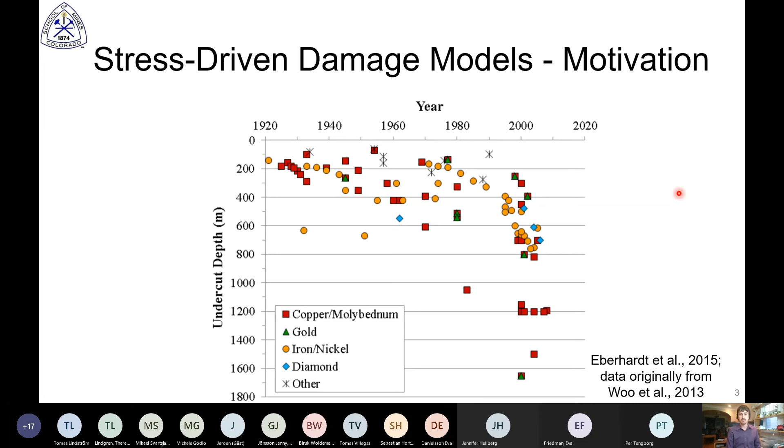So as we go deeper, of course, that means higher stresses, and that presents new challenges operationally and for ground control. Now, when we think about how we might meet these challenges, we really have three main classes of design. For analytical, in many cases, that's simply not going to apply because our analytical solutions impose too many constraints that really move them far away from reality. If we think about empirical solutions, these work great, but of course, their limitation is that they are most appropriate or work best in scenarios that are similar to the cases that were used to develop them.

And when we look at some of the common empirical systems that we use for design, the reality is that most of our experience that these were based on is in shallower cases where potential failure modes are more so gravity driven than stress driven. So again, as we move to these new, deeper, higher stress environments, these may not be always applicable.

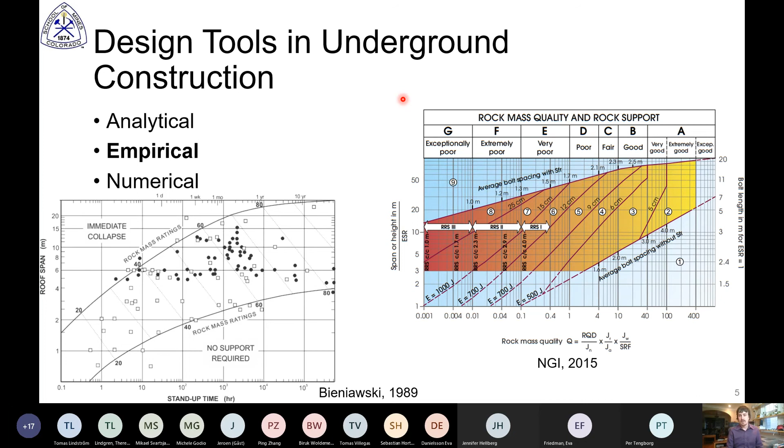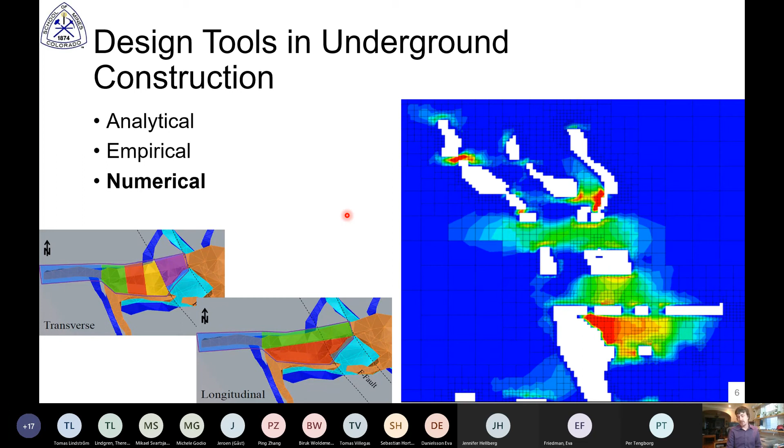Now, these are very common at the mine-wide scale, large elastic continuum models, just to understand stress transfer around excavations. But when we think about them in the context of understanding damage processes at a finer scale, really at, say, an individual pillar scale, for example, there are two major limitations. The first is that if we want to replicate these damage processes with continuum models, we really need to use some pretty complex constitutive models to replicate observed behavior.

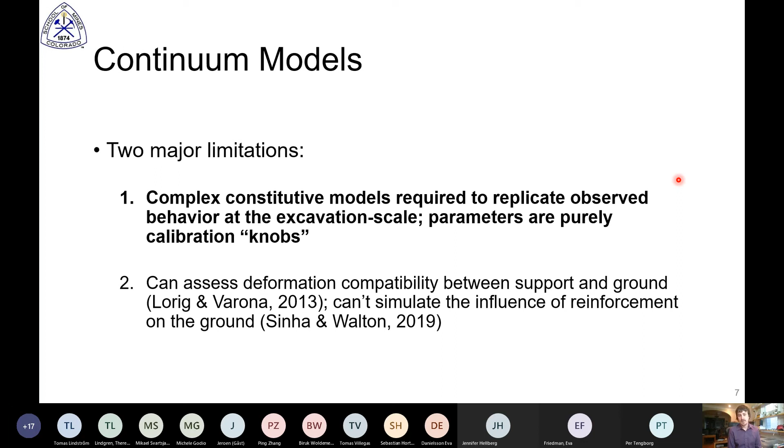And at some point, these models become so complex that we can end up in situations where the parameters basically just become a series of knobs. And if we have enough knobs to turn, our model can sort of do whatever we want it to. So this is a quick example of that, of an under-constrained model. This is from the AECL mine by tunnel case study in Canada.

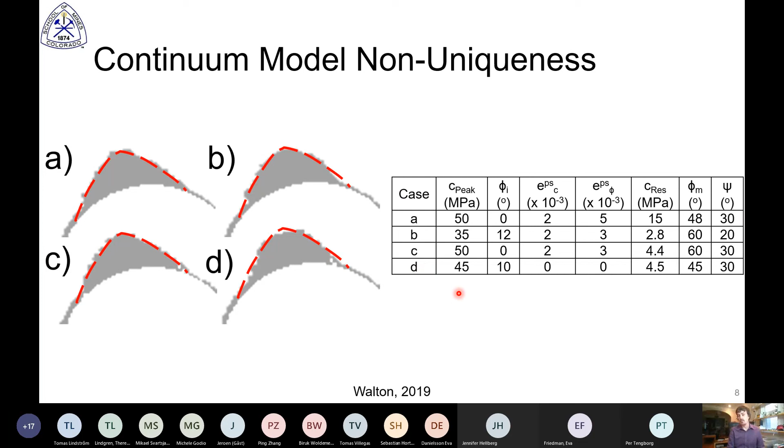Now, when we talk about bonded block models or discontinuum models, those are also relatively complex, and so a similar potential limitation could be noted there. But when you think of all these different discontinuum models, bonded block, grain-based models, combined finite discrete element method, they do have an interesting basic principle that I think is inherent in a lot of their promise for future application.

And the idea really is that unlike a continuum model where we're sort of coming up with a pseudo-empirical constitutive model to describe the emergent behavior, we can actually start with fundamental physics like Newton's second law and fundamental material properties more at the elemental level at a finer scale, and ultimately end up with realistic emergent behavior.

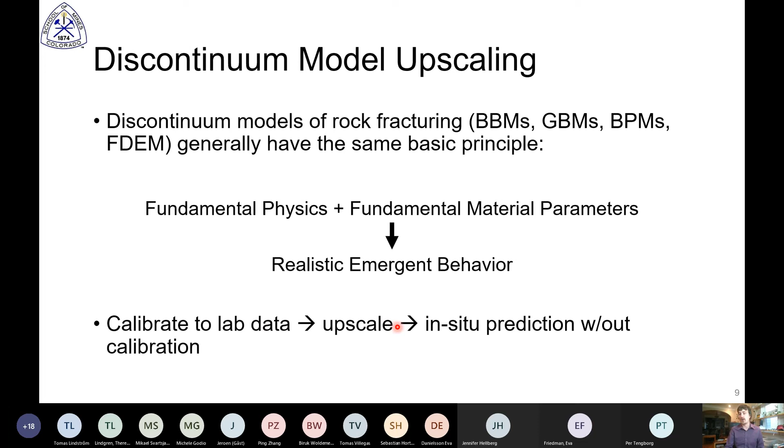And the concept is that if we have these more fundamental building blocks, then we could ultimately calibrate these models to lab data, upscale the parameters of these calibrated models to the engineering scale, and then actually make some reasonable in situ predictions without having to do a huge amount of calibration. Now, this upscaling here is the key part, and I'm not really going to touch on that today, but I think the concept that these models can be upscaled is really some of the value added for them.

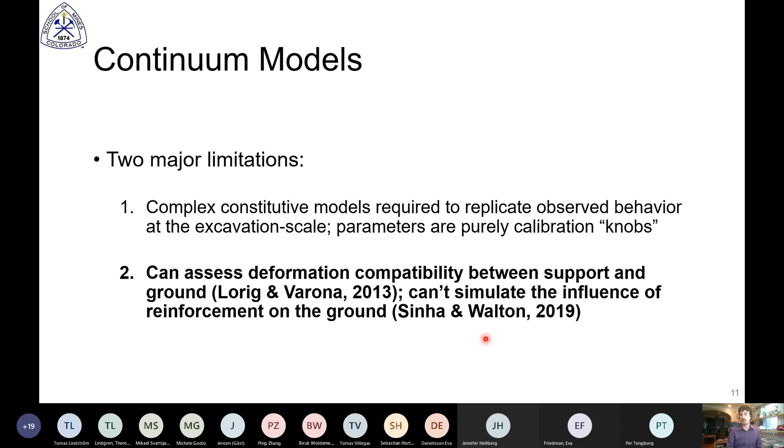The other limitation of continuum models is that while they're really good at assessing how support is going to respond to ground deformation, they're not very good at telling you how ground deformation is going to respond to the influence of reinforcement support. So I have a couple of examples to illustrate that.

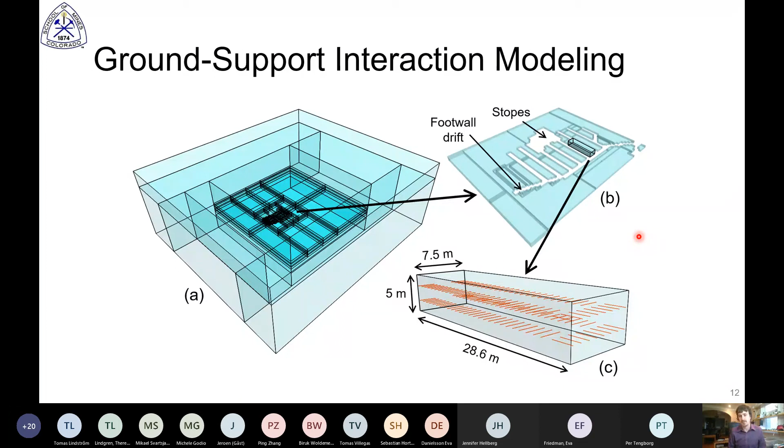The first is a case study from the Creighton mine, which we'll actually talk about in a little more detail later on. This is the mining area that we were looking at and a particular pillar of interest. And you can see here the support pattern, a dense rock bolt support pattern that was installed in a numerical model for this mine. And what I'm showing here is basically illustrating that lack of influence of the reinforcement elements in the continuum model on the model results.

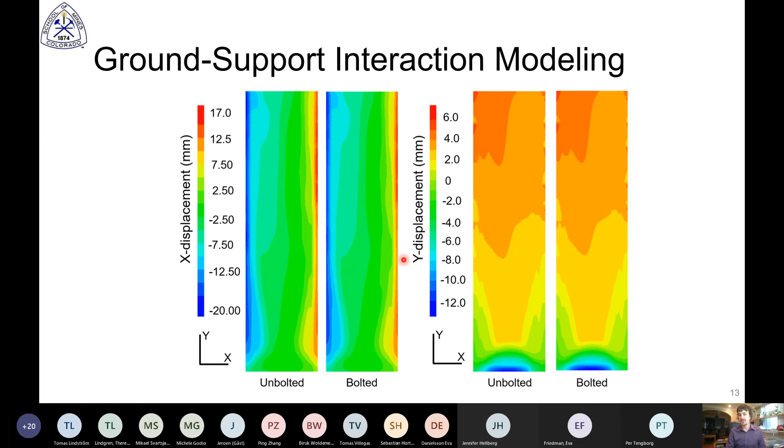So these are the displacements in two different directions, and we can see that whether we have that very dense bolting or whether we simply leave the bolts out, the ground response is basically the same. This is another illustration of that same phenomenon.

We wanted to look at, is this limitation just something to do with the structural elements, for example, that are implemented in FLAC3D? And so we developed this hypothetical pillar case on the right, where we're loading it monotonically, and we tested three alternative cases: one with no bolt installed, one where we installed the cable bolt element, so that same structural element used in the previous case, and then in the third case, we actually explicitly modeled the bolt as shown right here.

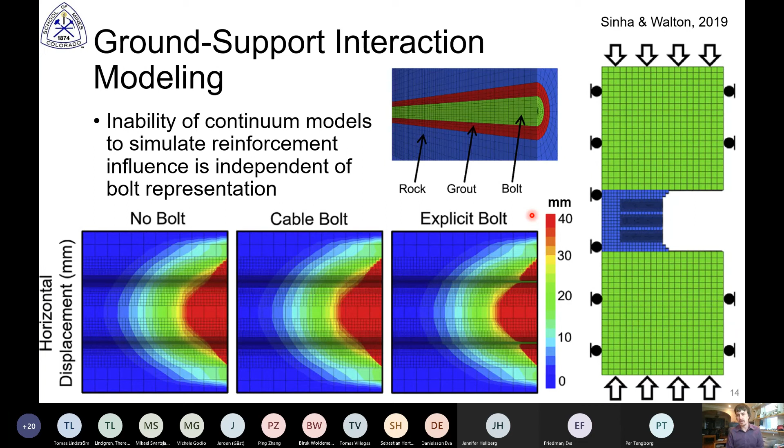So we actually had steel properties, grout properties, and then the rock. And again, regardless of how we represent the bolt, when you put those reinforcing elements into the continuum model, they don't really make much of a difference on the ground behavior, much less than we know occurs in reality.

And so the reason for this, we have to remember that the primary role of reinforcement is really to make the rock mass behave as a continuum by locking together blocks separated by discontinuities. But a continuum model, by its inherent nature, already enforces this constraint that the rock mass must behave as a continuum.

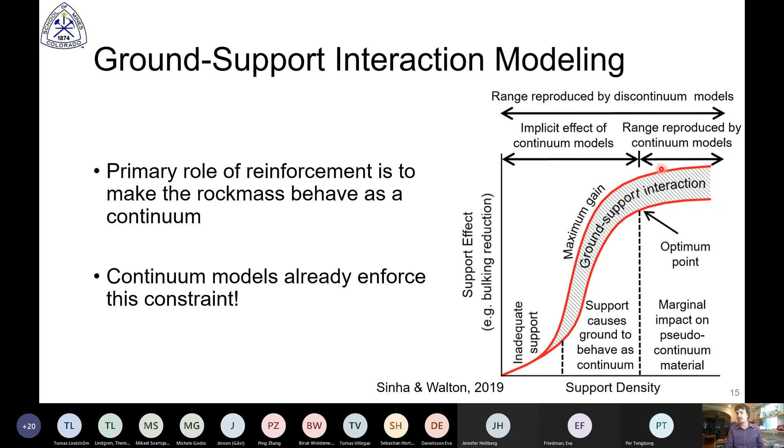So if we think of a graph, as shown here on the right, of basically how much the support is affecting the ground versus how much reinforcement we install, there's this portion of the curve where every little bit of support is doing quite a bit because it's helping tie together this rock mass into a continuum. But in a continuum model, that is already enforced, and we're basically just getting this portion of the curve here.

So to summarize, why would we look at bonded block modeling as a way to study these stress-driven damage processes and rock support interaction? Well, with deeper and deeper excavations, we need new design tools. Continuum models have limitations in terms of simulating ground support interaction. And we need a discontinuum approach.

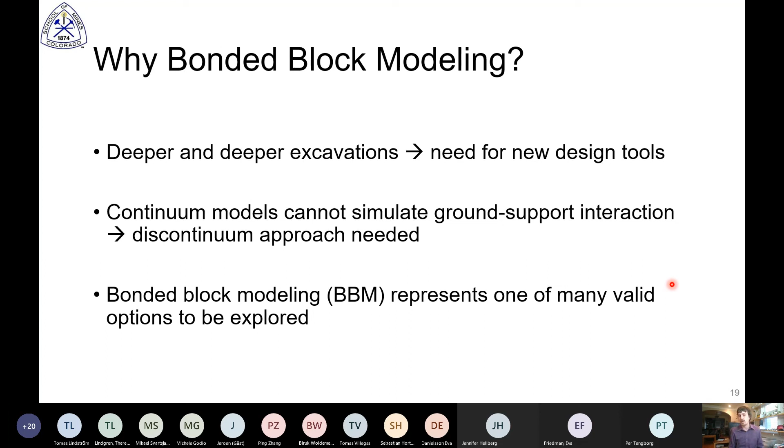And when it comes to the discontinuum approach you might select, I'm not here to tell you that bonded block modeling is necessarily better than any alternative approach, say using PFC or a combined hybrid finite discrete element method. It's one of many valid options to be explored, and it happens to be the one that we've been focusing on and have some promising results for.

So with that in mind, there are three main questions that I want to address today. The first is, what are the physical phenomena that BBMs can reproduce, and how does it depend on the choices that we make during model development? Can we reproduce field scale behaviors of BBMs, and not just the peak strength, but also some of these other characteristics related to deformation and dilation?

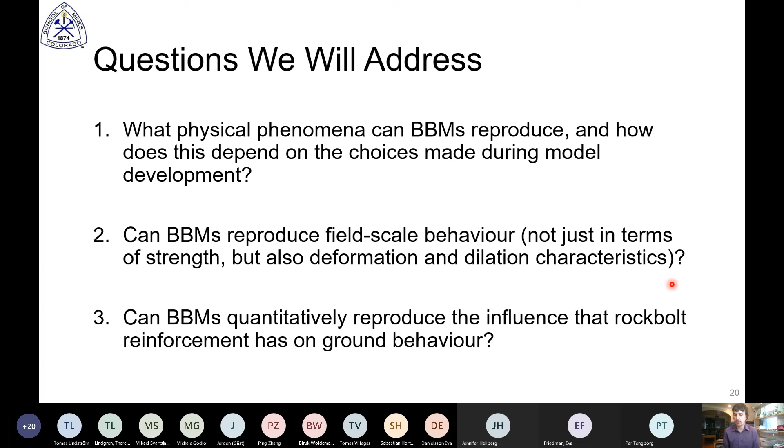And then last but not least, can these BBMs reproduce the influence that reinforcement has on ground behavior, not just in a sort of a qualitative way, okay, more support means less deformation, but really quantitatively, can we reproduce this behavior?

So before I go any further, I should probably stop for a moment and let you know what I'm talking about when I say bonded block model. Basically, the idea is that we're representing the intact rock as a series of polygonal blocks. So these blocks are shown here with black lines indicating the contacts between adjacent blocks. Within the blocks, the material is represented as a continuum with finite difference zones.

And we can basically assign a continuum constitutive relationship to these zones within the blocks. So within the blocks, it's a continuum model, but basically as the block contacts fail, the individual blocks can detach and separate, and that's what makes it a discontinuum model.

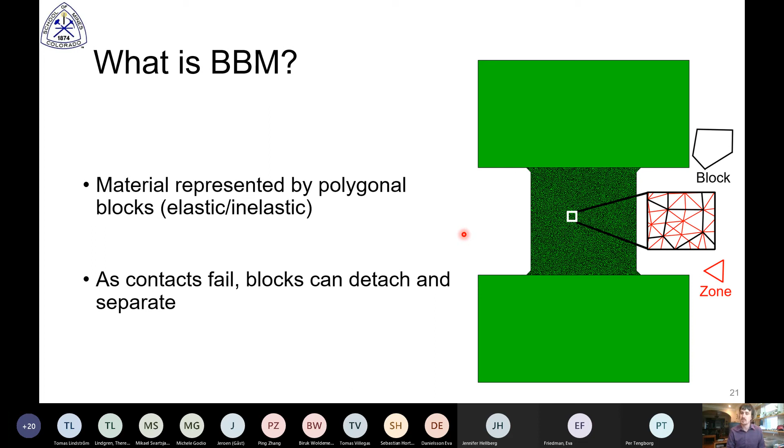So I want to start by talking about some laboratory scale bonded block models, because of course that's the most well-constrained case to study. And I want to highlight the fact that we need to make some decisions related to how complex we want our model to be. So there are two questions. The first is, do we want to make the blocks elastic or inelastic? And in the context of a laboratory scale model, this is basically asking, do we want to allow inelastic deformation of the grains? So are we basically trying to simulate intragranular damage?

And then do we want to use homogeneous or heterogeneous properties? Of course, it's simplest to just use one set of properties for all the blocks and all the contacts. But a more realistic approach would be to assign different stiffnesses to different grain types, as well as different contact properties for different pairs of minerals.

Now, there's lots of different studies that calibrate models to different rock types, but the problem is that in the literature, there's basically studies that have different rock types and different types of modeling approaches. What there's really been a lack of is studies that take one rock type and compare how these decisions on complexity impact the ability of that model to replicate that one rock type's behavior. So that's what we spent some time working on.

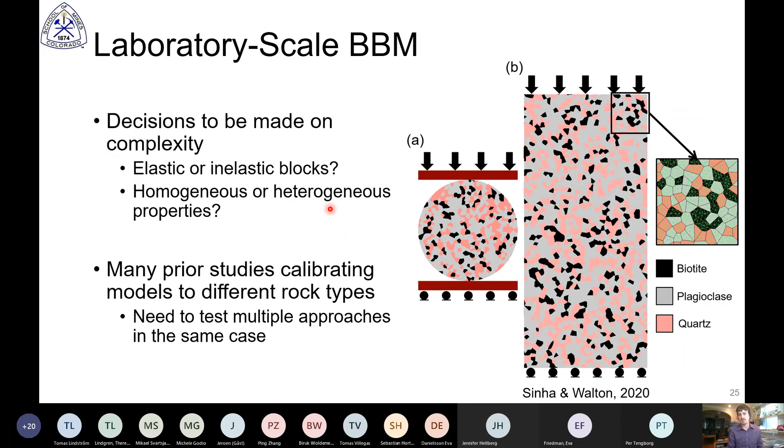And what I'm going to present to you first is basically our most sophisticated model, just to illustrate some of the capabilities of the bonded block model.

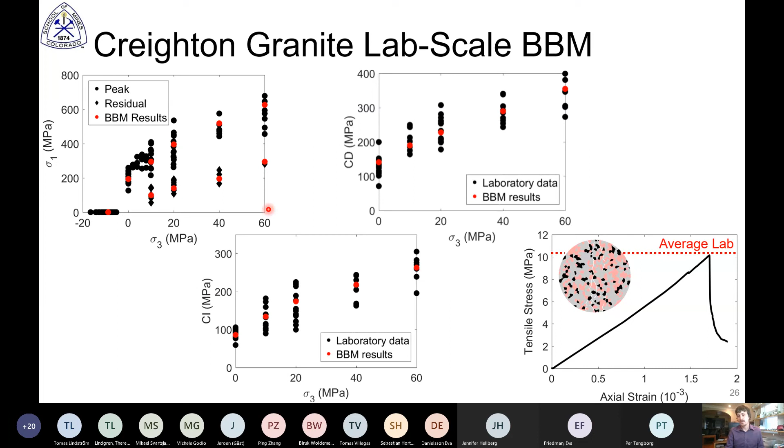So what I'm showing here is that the bonded block model that we developed for the Creighton granite, which is what you saw on the previous slide, is able to match not just the peak strength, including the curvature of the strength envelope, but also the stress damage thresholds, crack damage and crack initiation, as well as the residual strength. You can also see in the bottom right here, we're able to match the Brazilian tensile strength.

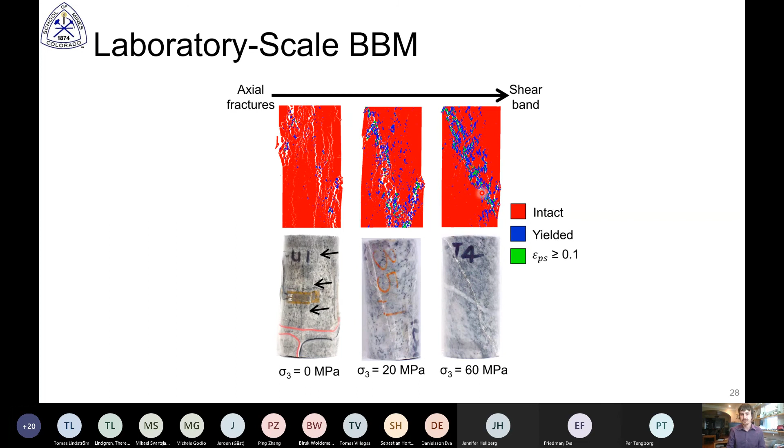And of course, mechanistically, we see that as we go from lower confinement to higher confinement, we have a transition in failure mode. The way that's represented in the model basically transitions from intergranular fracturing simulated by the opening of these contacts between blocks or grains, to intragranular damage represented through this inelastic continuum model that we've assigned to the mineral grains. So that was the heterogeneous inelastic model, our most complex case. And what we showed is that basically you can replicate all of these observed behaviors of the rock.

Now, if we look at these simpler cases, what we can see is that in both the elastic models, the ones that neglected the potential for intragranular damage, these have difficulty replicating the higher confinement peak strength as well as the post-peak behavior. And the simple reason for this is that mechanistically, you have the most intragranular damage in brittle rocks at high confinement or in the post-peak region. And so if you don't allow that damage to be simulated, you can't replicate those attributes of the rock.

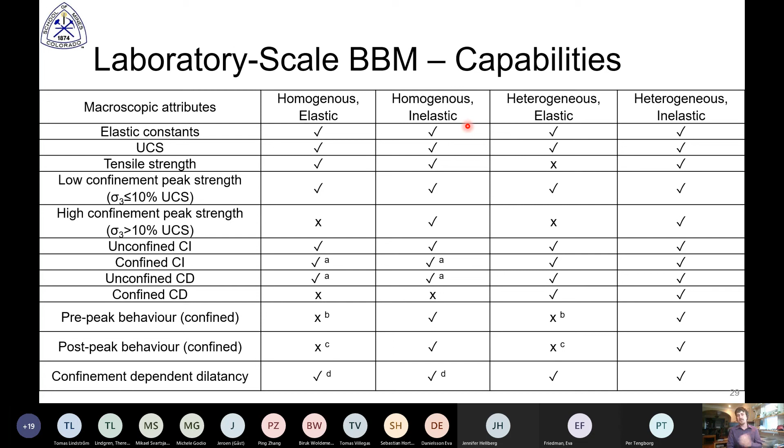The homogeneous inelastic model actually does relatively well, but it's not great at replicating the pre-peak damage. So the crack initiation and crack damage thresholds, the heterogeneity of the mineral grains at the lab scale really do control those thresholds. So with this in mind, we can now start to think about what it might mean for the field scale. And of course, at the field scale, things are a little different because your individual blocks no longer represent individual grains. So we have to make a few decisions about these. And the first is the block shape.

Now, in terms of block size, as I mentioned, at the field scale, it's not the same thing as a grain, but I also want to emphasize it's not the same thing as what we think of for a finite difference mesh. So it's not like, as you make your block size finer and finer, you will necessarily be getting a more and more accurate result in your model. And the reason is the finite difference mesh is a mathematical construct to basically help discretize a partial differential equation, whereas the blocks are really just a predetermination of the potential fracture pathways that can develop in the model.

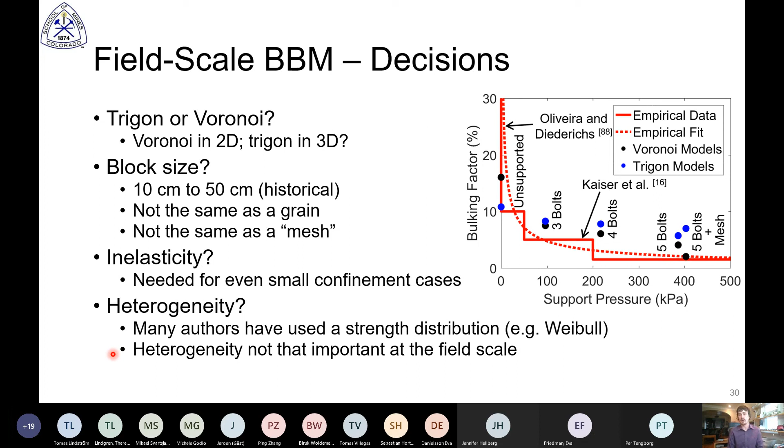Now, in terms of heterogeneity, it's quite common to use a distribution such as Weibull for the strengths of the contacts in the field scale bonded block models. I know this is something that Itasca does, but in our studies, what we actually found was that we didn't need to include the heterogeneity. We could certainly, but this added complexity was not necessary to replicate all of the behaviors that we observed in the field.

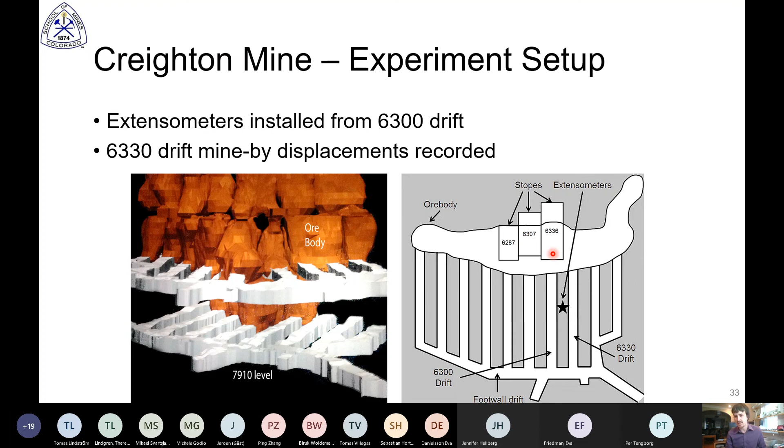The experiment that we conducted was performed on the 7910 level, so 7,910 feet below surface. And the idea was to install extensometers in this pillar here. We installed them from the 6300 drift on the left before the 6330 drift had advanced. So this allowed us to basically do a mine-by as the 6330 drift went past the instruments. And then we also monitored to see how the pillar behaved as these 3 stopes were excavated.

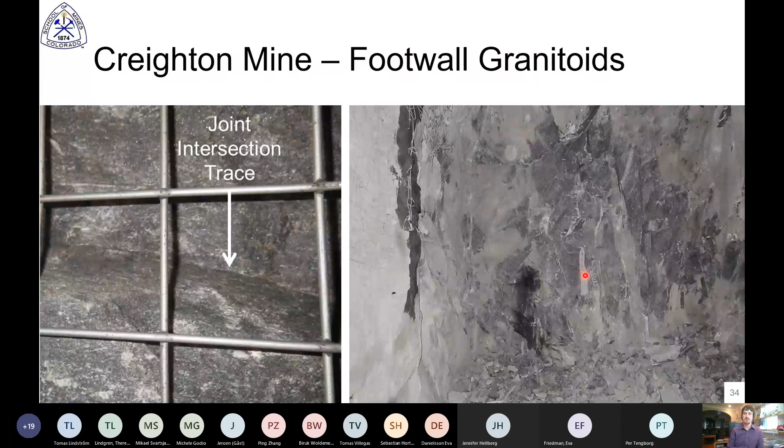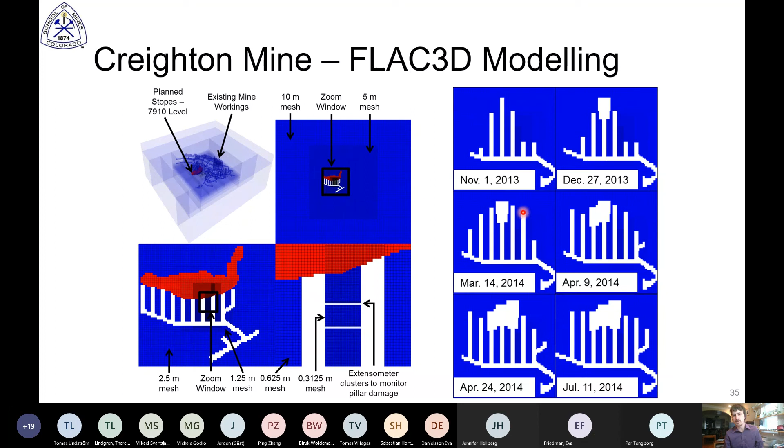So once we had the extensometers installed and were collecting data, we started to model this in FLAC 3D. You can see the modeled area here, and then a zoom in to the mesh of the extensometer instrumented pillar. This diagram on the right shows the sequencing. November 1st, 2013 is when we installed the extensometers right here. You can then see this stope was excavated next, followed by the mine-by of the 6330 drift, and then subsequent mining in the surrounding stopes and drifts.

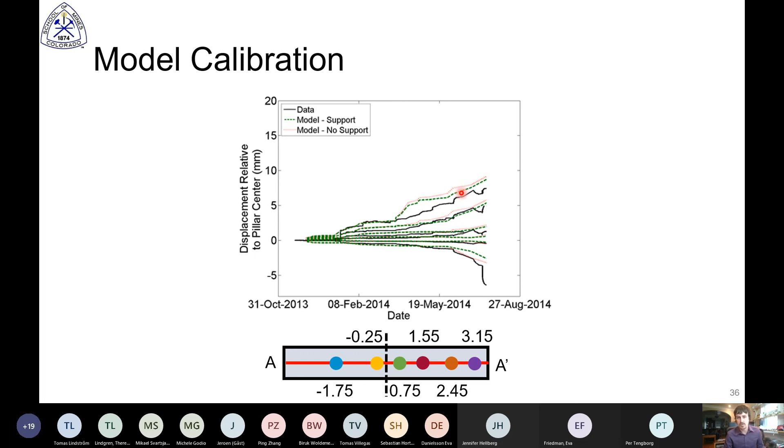And basically what I want you to take away from this figure is that A, we have a relatively good match between the model and the data over the course of the mining sequence. And B, again, this is an illustration of the fact that if you run this FLAC 3D model with no support, as shown in the red, or with support, as shown in the green, you basically get the same result. And again, I just want to emphasize that's not what's happening in reality. The support is doing quite a bit here.

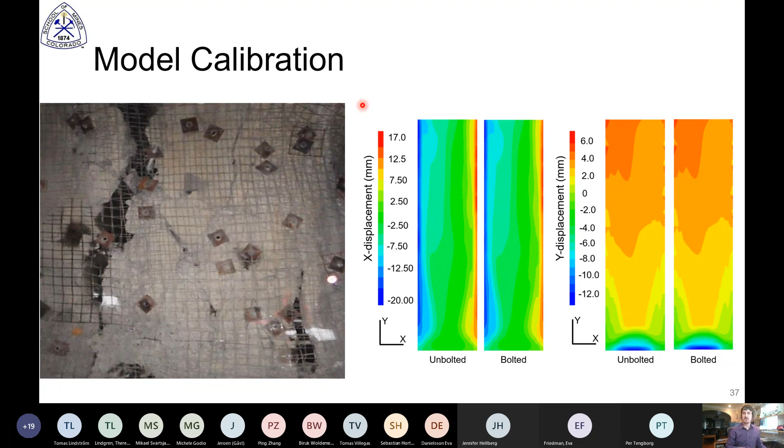So because of this limitation in the representation of ground support interaction, we developed a bonded block model to study this case. Basically what we did, because it wasn't really realistic to model this whole area with the bonded blocks, we simply took a cross section at the area of interest where our extensometer was. We extracted the displacements at the top and bottom of the pillar from the FLAC 3D model, including the shear displacements. We then took those in 47 steps and applied them to the bonded block model per the mine sequence.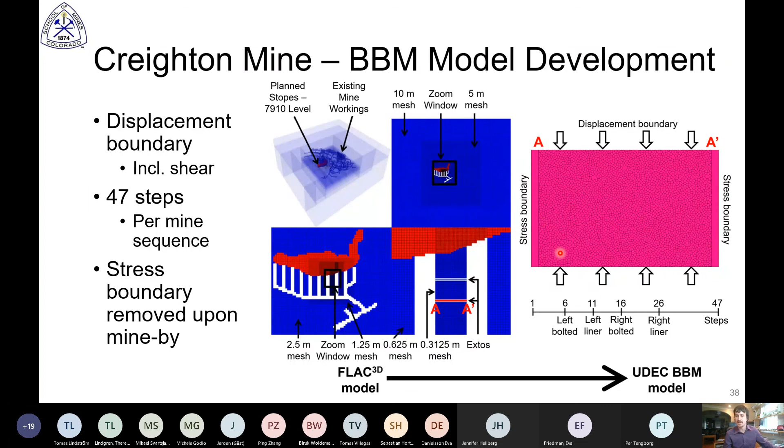One interesting emergent behavior of this model is that when we looked at the peak strength of the pillar in the model, the ratio of that to the UCS was 45%. And if we compare that to the Hedley-Grant empirical pillar strength prediction of 0.47, we're actually within 5% of the Hedley-Grant predictions. So this is really interesting in that we weren't trying to calibrate the peak strength. We calibrated the displacement behavior, and the correct peak strength was an emergent behavior of the model.

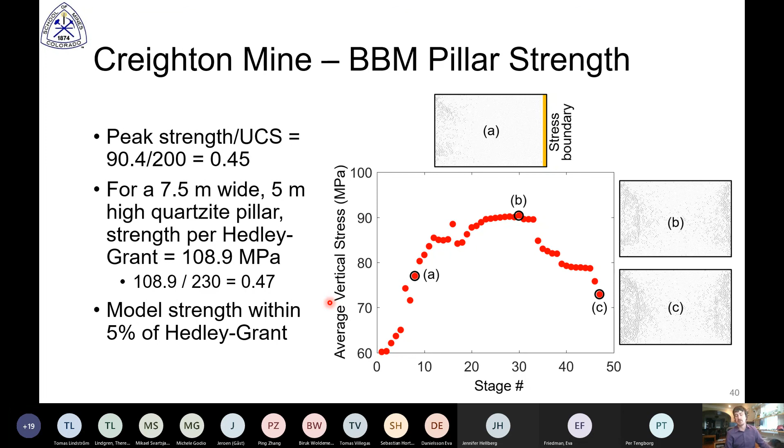So this is the West Cliff mine, which is an Australian longwall coal mine that was studied in detail by Colwell. And what really makes this unique is that there are 2 pillars, Site A and Site B, that are basically identical in every way. They end up undergoing the same loading path and same material. But Site A had 2 bolts installed along its height, whereas Site B had 4 bolts. So this allows us to do sort of a direct comparison in our models.

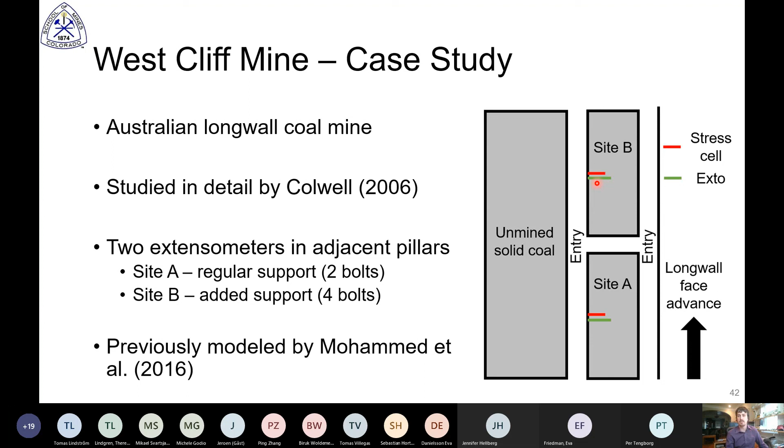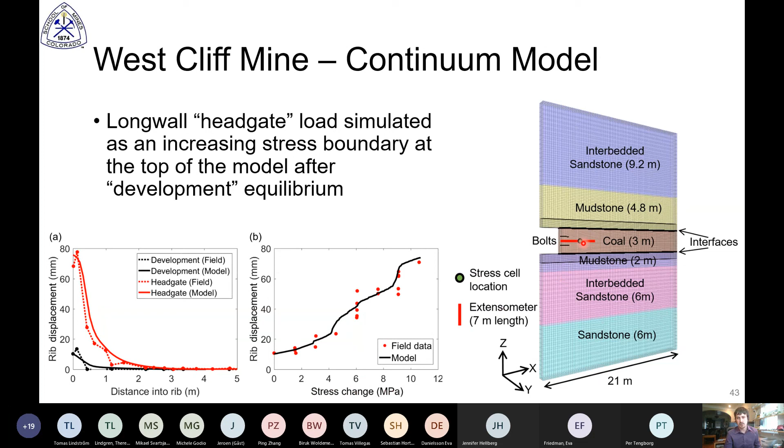Again, we started with a continuum model. You can see the stratigraphy here, as well as the instrumentation that we were using, 1 extensometer, as well as a stress cell 4 meters into the pillar. And you can see that the extensometer measurements at multiple stages in the mining sequence were well replicated, as well as the relationship between the displacement right at the edge or rib of the pillar and the stress change observed on this stress cell a little further in.

Now, when we look at the actual measurements in situ, we can see that the displacement at the boundary of Site A pillar, the difference between that and the displacement at the boundary of the Site B pillar is about 70%. So simply by adding 2 more bolts, going from 2 to 4, we have a 70% reduction in displacements. But in the continuum model, again, we see that that support effect is severely underestimated.

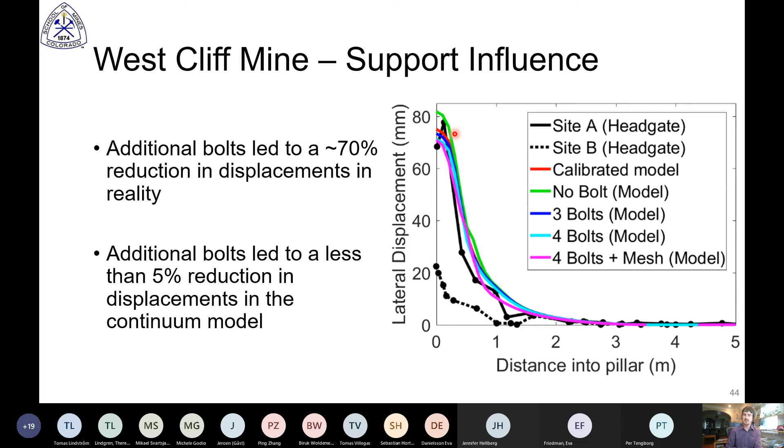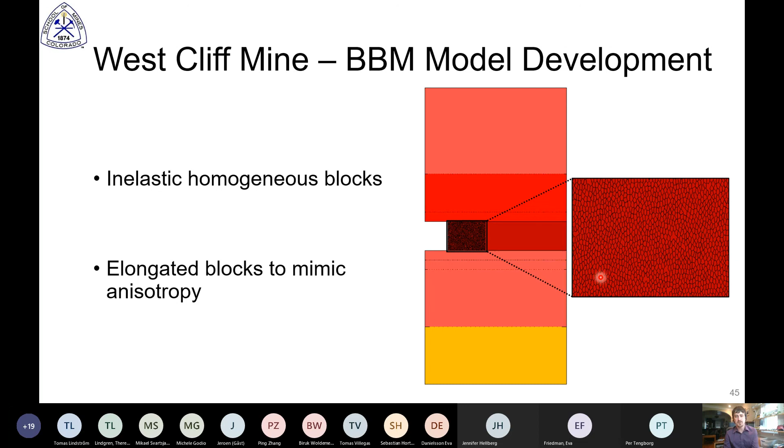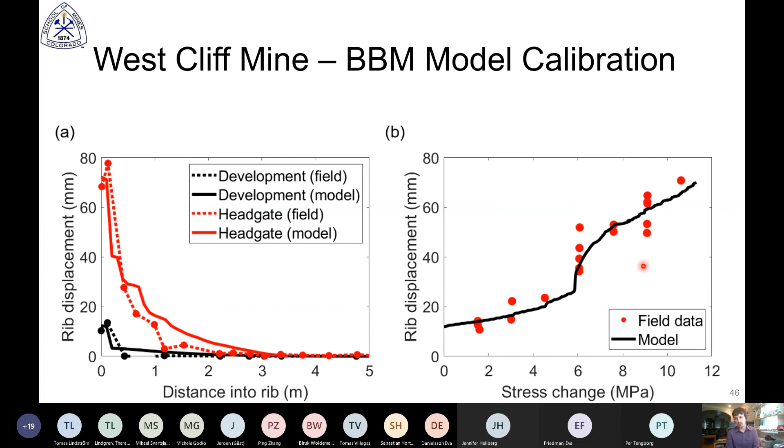So we developed a bonded block model for this case. Again, we used inelastic homogeneous blocks. And we elongated the blocks a bit so that we had some anisotropy to mimic the cleating fabric within the coal. We calibrated the model. Again, you can see it matches the observations at the site quite well. And this is, I should say, the Site A results. So this is the case with 2 bolts. And once we had the model calibrated with 2 bolts, we had appropriate parameters for our coal material.

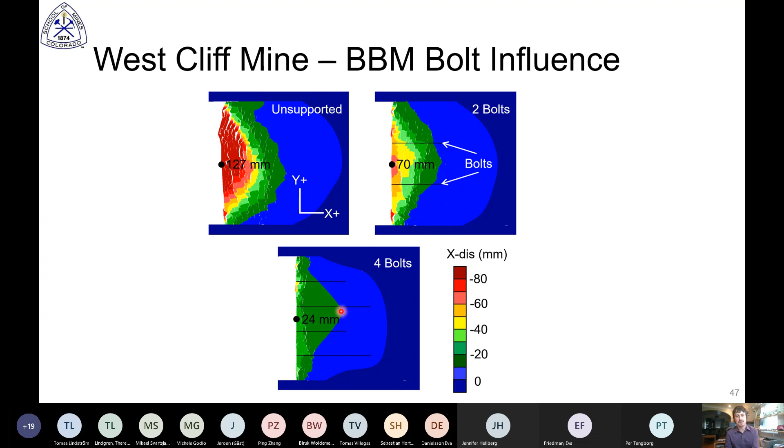We then added in 2 more bolts to replicate Site B, and we were able to observe that approximately 70% decrease in displacement. So this is the calibrated model for Site A, and then we simply took that Site A model, didn't recalibrate or change anything. We just added 2 more bolts, and we were able to quantitatively reproduce that decrease in displacement produced by the support.

So to conclude, I just want to go back over these questions that I originally posed and the answers that we've developed. In terms of the phenomena that BBMs can reproduce, we found that if you introduce sufficient complexity into the models to replicate the different physical phenomena that are taking place, then all of the observed parameters can be matched. Block inelasticity is really critical if you want to simulate confined behavior, and this is true at both the lab and the field scales.

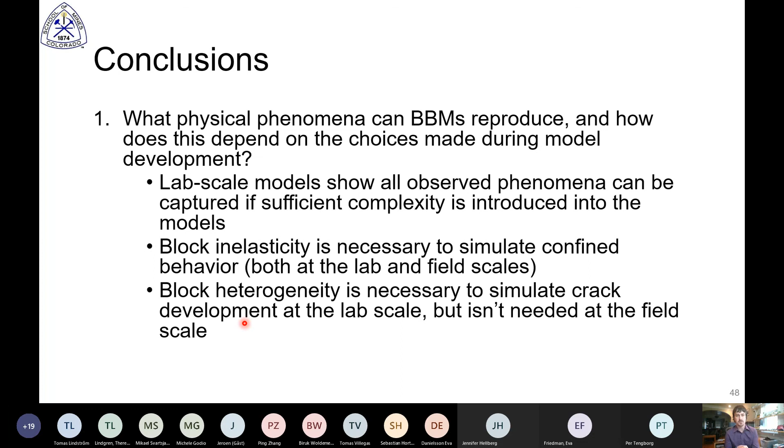And while block heterogeneity is necessary to simulate crack development at the lab scale, we found that it was not needed at the field scale to obtain realistic results. In terms of reproducing field scale behavior, we showed that this is certainly possible. And in fact, the Creighton mine case demonstrated that calibrating just to displacements can actually provide correct strength as an emergent model behavior.

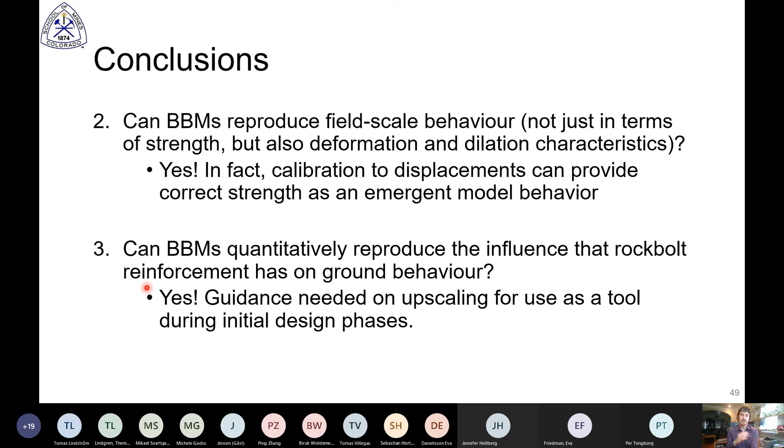Last but not least, can BBMs quantitatively reproduce the influence that rock bolt reinforcement has on ground behavior? Absolutely. And this is quite significant in that now if we have appropriate upscaling tools, we can calibrate models in the lab, upscale them to the field, and then predict how the rock might behave in response to different support designs. And this could be really useful during initial design phases.